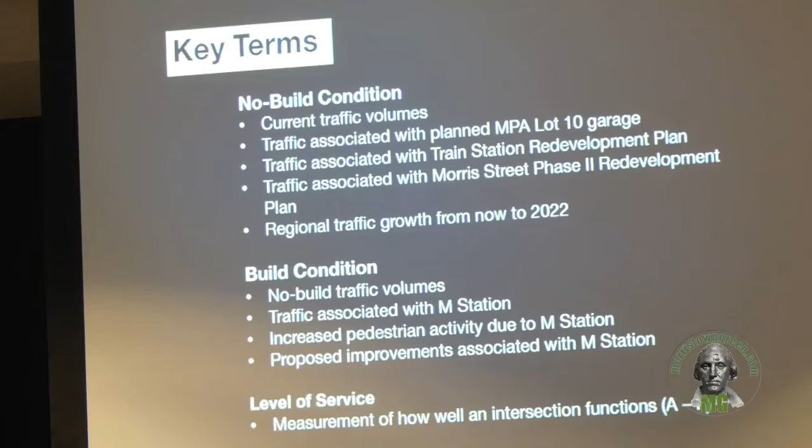And how we do that is we're really measuring what we call level of service, and it's really the amount of delay that you may experience on average at an intersection. And we take that number that you see in delay in seconds and equate it to a letter grade, like you're in school. It's a report card. So level of service A is best, least amount of delay. It goes down to level of service F with the most amount of delay. So A through B, C, D, E, F. So we try to keep it where we can make that comparison. So that lays the framework of what we're trying to compare to see what potential impacts we may see.

Again, as Phil alluded to, this is the transportation network, so it ran from the green on Morris Street out to Ridgedale, and then from Speedwell Avenue on Spring Street corridor down to Morris. So it encompasses 10 intersections, essentially.

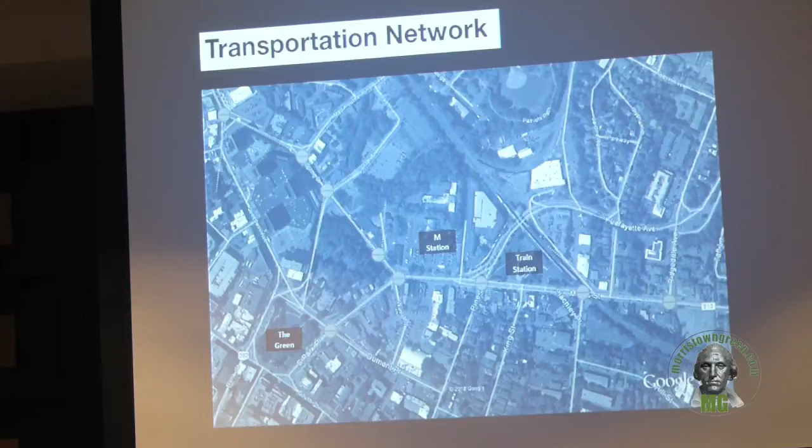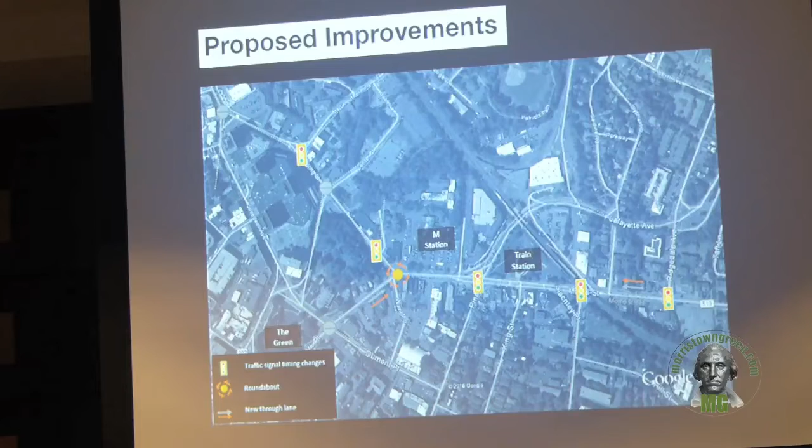And we've talked a lot, I think, in the previous meetings about the roundabout as a proposed solution at the intersection of Morris and Spring, but there are other improvements that are potentially getting done with this project, particularly signal timing changes along both corridors to try to provide better progression along both those corridors, as well as potentially some changes to provide some additional through lanes in certain areas to get that throughput through there and potentially reduce any delays or impacts.

So getting really into the questions that we were asked, is this roundabout feasible? That's the first thing that we looked at. So we wanted to know the design that the applicant's traffic engineers have put forward, does it meet recommended standards that are set, national standards by Federal Highway Administration and some other guidance. And we're really looking at certain geometric elements.

So we're looking at the inscribed diameter, which is here, which is essentially the width of the roundabout. There's certain parameters, should it be a certain X number of feet wide, and that plays into the deflection that you may see going through the roundabout. The deflection causes you to slow down going through the roundabout, makes it safer, and it also could impact the capacity if it's too small or if it's too wide. You may go through too fast.

So we want to look at inscribed diameter. We looked at the entry radius, entry width, entry angle. All these geometric elements play into not only the capacity of this potential roundabout, but the safety of it as well. So just to go back and answer what we found.

So we compared what they designed versus the national guidance that we see, and generally all of those recommended guidance are met. There's some that are at the minimum value level, but that's understandable given this context. The building's fairly close to the road, not a lot of width to widen too much. So we felt comfortable that most of those design guidance are within the range that they should be.

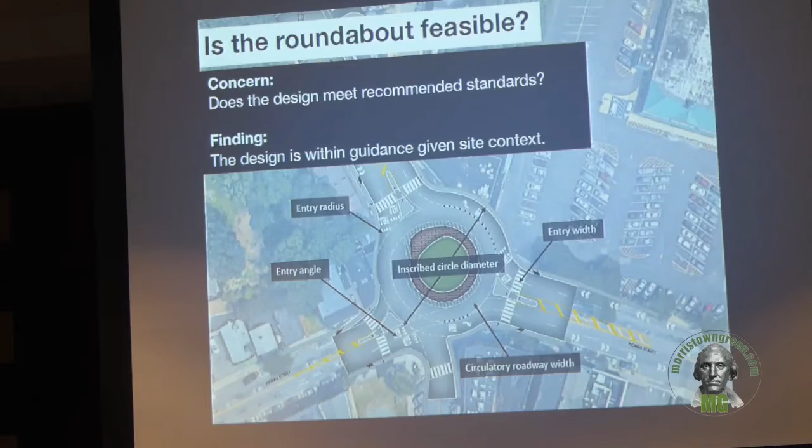So the second part of looking at the roundabout feasibility was really the operation, and really we took an isolated look at this roundabout in particular. Does it function properly? And the key performance metric that we looked at was a volume to capacity ratio. Essentially, volume to capacity is how much volume could this roundabout handle, and how much volume are they putting through this intersection, so can it handle those numbers? And that value really is 85% of capacity. So the volume should be 85% of what it theoretically can handle.

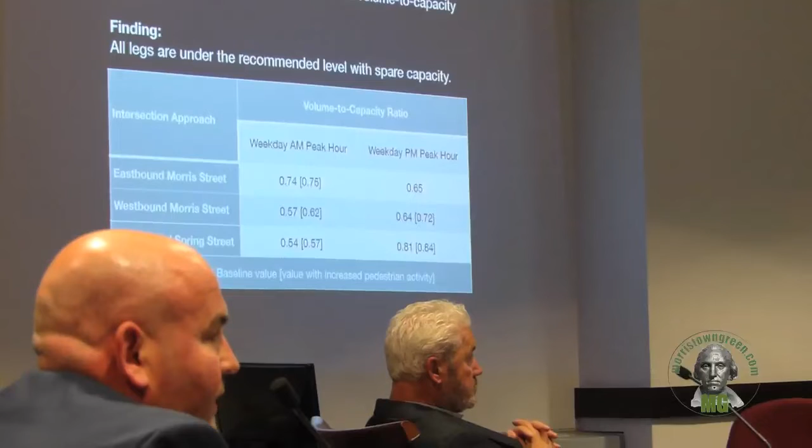So looking at the values that you see in the build condition, again, with their potential development and the traffic impacts that you may see, as well as the nearby developments that may happen by 2022, as well as the regional growth, also looking at the increased pedestrian activity that you may see at the intersection, all of those values for all the lanes of the intersection are below that recommended threshold. So we were comfortable that from an isolated operation perspective, it is feasible to put a roundabout at this location.

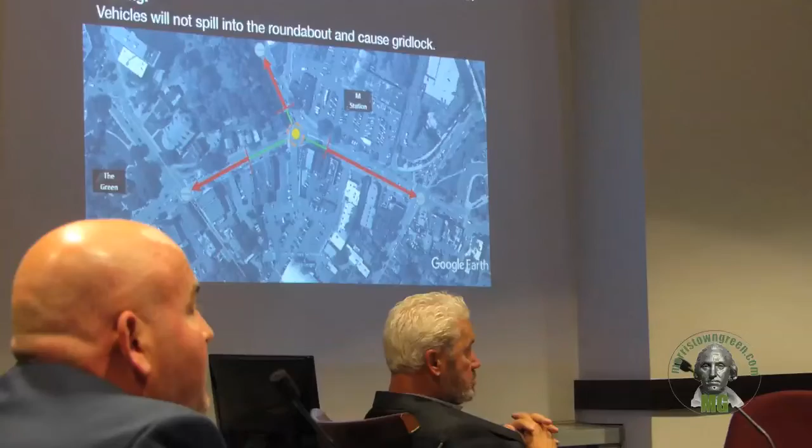The third aspect of is it feasible was to look at: is queuing of vehicles from the adjacent intersections going to back into the roundabout, causing gridlock conditions? So we don't want traffic backing up from their proposed signal at Spring Place, or the signal at Lafayette, into the roundabout, not having the ability for vehicles to circulate around.

So we ran some independent modeling of the simulations to see are vehicles going to be spilling back into the roundabout and causing a gridlock condition. Based on our findings and our analysis, we did not see that. We did not see spillback conditions or gridlock that would be impeding the use of this intersection as a roundabout. So again, we felt that it was feasible from that perspective.

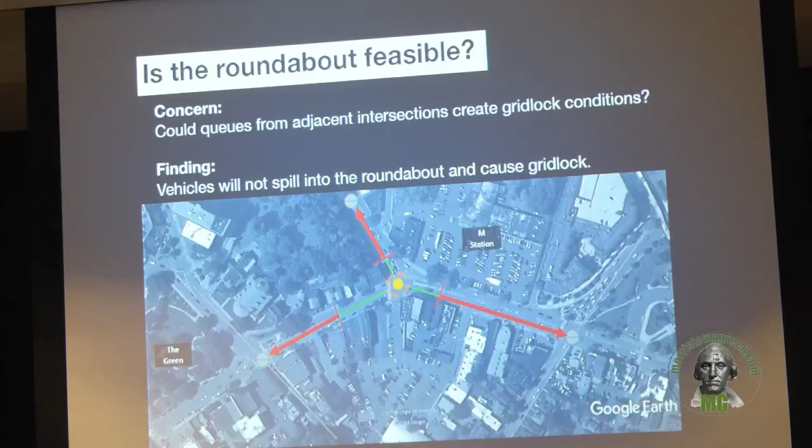So moving on, the second question that we were asked was, does this project improve the performance of this particular intersection of Morris and Spring Street? We looked at it two ways. We looked at the overall intersection performance. How is it going to operate? No build conditions without their development, and with their development on top of the no build conditions. And then we looked at the critical movement, which is that Spring Street left approach to eastbound Morris Street.

So first we looked at the overall intersection, and what we were finding in these results was the overall level of service, the overall delay that you experience at the intersection is going to decrease fairly significantly, up to over 60%. And that's understandable given the nature of a roundabout versus a traffic signal. Traffic signals give a priority to certain movements, which cause increased delays for certain movements. A roundabout really takes a blind eye to that, and it's just multiple yield conditions for each approach. When you get there, you have an appropriate gap to go through the roundabout and you take it. So these results, again, are based on our independent modeling of the intersection, comparing no build to build conditions.

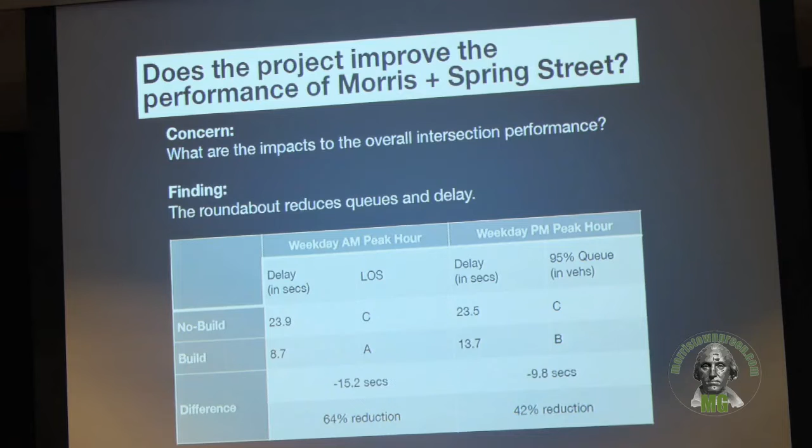Second part of that was looking at that critical movement from Spring Street, southbound to eastbound Morris Street. And we know that it backs up fairly significantly, particularly in the afternoon. And we're seeing a decrease in vehicle queuing for that southbound approach, both in the morning and in the afternoon. And we're seeing a decrease in the delay that you're experiencing for that movement, both in the morning and afternoon. Again, these results are based on our independent modeling of this intersection. So that, again, leads us to believe that this project with this roundabout will be an improvement at that intersection in terms of operation.

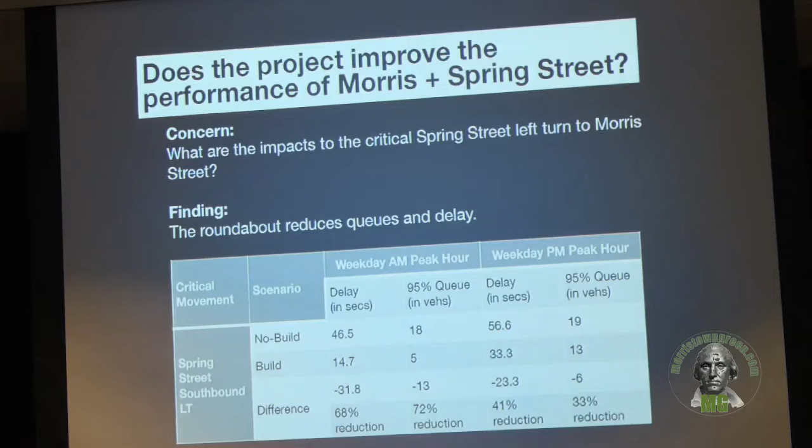So moving to the third question, how does this project and this roundabout impact the overall network and the corridors of Morris Street and Spring Street? We focused on how long is it going to take you to travel through those corridors? And is it going to increase significantly from no build, without the development, to build with the redevelopment project?

We took a very conservative estimate and approach to this. We looked at, if you go from point A to point B, how quickly do you do it based on the posted speed limit, and there's no other cars on the road. And then we added in the delay that you'd experience at each intersection that you'd go through.

The reason we did this was, one, to be highly conservative, to give a very conservative estimate, but two, we think this type of simpler review of corridor travel times can be utilized as the town potentially moves forward with some of those mobility improvements that they're talking about, and look at capital improvements, A versus B, which one, from a cost-benefit perspective, makes sense. Simplest terms.

So what we were finding in this highly conservative estimate is that a majority of the travel times through these corridors would be reduced by up to a minute. Two movements, we saw a modest increase of 30 seconds, but no more than 30 seconds. So when we look at it on a holistic basis, looking at all the corridors that you would potentially be traveling through, we don't see this as an adverse impact to traveling through these corridors.

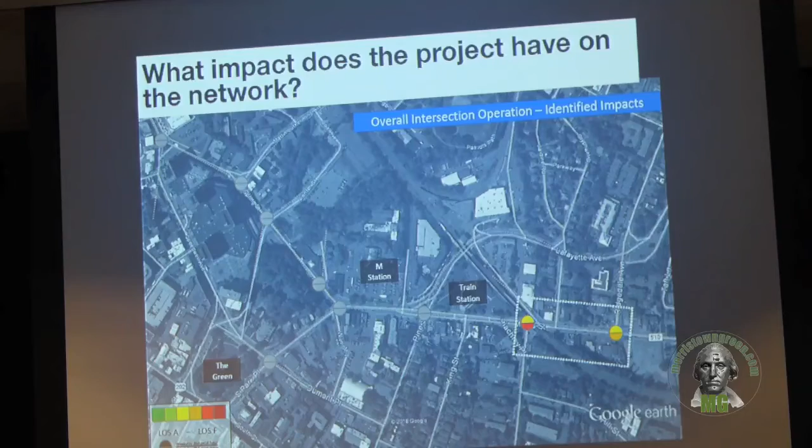The second one is Morris Street and Elm Street. And again, it's in the weekday PM, so the afternoon commuter peak hour. And you're seeing a change in level of service from a D to an E, and an increase in delay by 13.6 seconds. So there are the two impacts that we see in terms of the overall network that's been studied.

And the redevelopment plan does have language talking about how that can be mitigated. And it specifically mentions that the redeveloper shall submit a report prepared by a traffic engineer that identifies a proposed mitigation measure, substantiates their impacts, and then provides estimates, and then from there we can figure out what the best solution is at these two locations, and what can be done there, and what makes the most sense. So that was the third question.

Fourth question was, how can we best accommodate those vulnerable users at this intersection? So bicyclists, pedestrians, visually impaired pedestrians, transit, anybody that's not an automobile. So today, based on the current design, there are some elements that have been implemented as part of this project that will enhance the experience for pedestrians and bikes.

And that includes the rectangular rapid flashing beacons, which are the lights that flash when you want to cross the street. And they provide a visual enhancement, so that vehicles know that pedestrians are crossing. That's been identified and incorporated into the concept at this point for the roundabout. There's also the raised lane dividers that we've asked to be incorporated into the design. The traffic engineers have done that at this point.

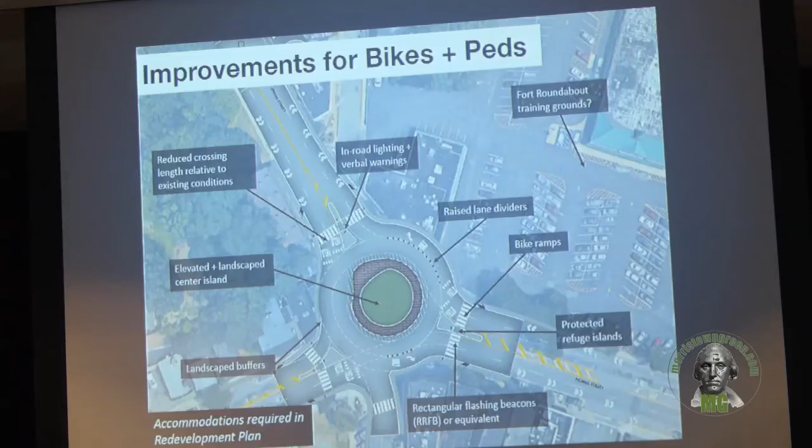The reason for that is to shorten your crossing, so now you're not crossing 4 lanes of traffic, you're crossing 2 at a time. And it also adds to the deflection to slow vehicles going through the intersection. So some of the other elements that are going to be looked at in terms of the plan by the planning board really go towards should we raise the crosswalk? So should the crosswalk be at the same level as the sidewalk, which would provide more enhancement, more visual cues that somebody's crossing there?

Should we stagger the crosswalk? So what happens now in a roundabout, it's a little bit more difficult for visually impaired folks to walk through it because they don't have the cues from the sound of cars coming by as they typically would at a normal intersection, because they're going around the circle. So a staggered crosswalk will push this crosswalk further away from the intersection, so they're getting the noise and vibration cues that they typically would get. But also, if the crossing's down here and say 2 vehicle lengths are here, it would allow 2 vehicles to stage while pedestrians are crossing and not impact the circulating flow through the roundabout. That's another option that we'll be looking at.

Another option would be, do we replace the rectangular rapid flashing beacons that are already proposed with HAWK signals? One was just put in at Flagler and Speedwell Avenue. It has the red lights at the top, 1 yellow light at the bottom. It stops traffic when a pedestrian wants to cross, but it's not a full traffic signal. So when there's not a pedestrian crossing, essentially vehicles can continue through. What it does provide is a push button that you see typically at traffic signal intersections. Push the button, it'll tell you when to cross or when not to cross.

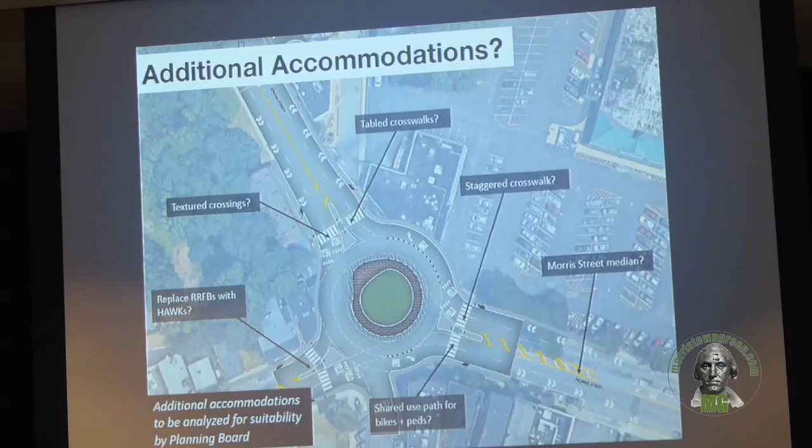And some of the other things that we're looking at are a shared use path around the perimeter of the roundabout to accommodate bikes that aren't comfortable riding their bike through the roundabout, and feel more comfortable dismounting, walking around, or potentially riding the bike around on a shared use path. So we'll look at that. And then finally, textured crossings that we'll also look at.

So just to go back to what we were asked to look at: is the roundabout feasible at this location? Based on our review of the information that was provided by the applicant's traffic engineer, as well as independent reviews and modeling that we did, we agree it's feasible at this location. Does the project improve the performance at this location? Again, based on our review of their information as well as our own independent review, we feel that it will improve the operations at this intersection.